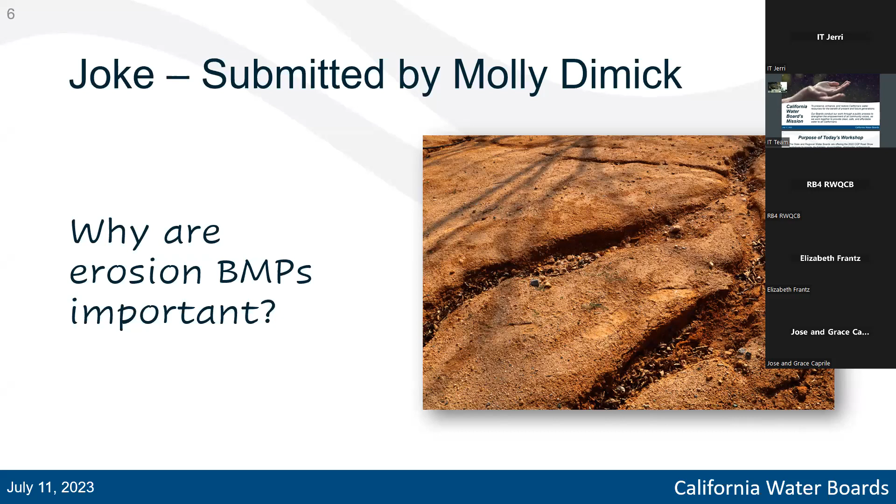And with that joke aside, let's move on to the requirement overview. So just to break down this presentation, I'm going to provide a little bit of background on the NPDES Construction Stormwater General Permit, and then move on into the requirements before getting into the question and answer session, but we'll have Matt's presentation in there as well.

So let's begin this presentation with some construction stormwater permitting context. The Federal Clean Water Act prohibits certain discharges of stormwater to waters of the United States, except those that comply with a National Pollutant Discharge Elimination System permit. The Construction Stormwater General Permit is a specific NPDES permit that regulates discharges of runoff generated by precipitation over construction sites and other areas of active land disturbance.

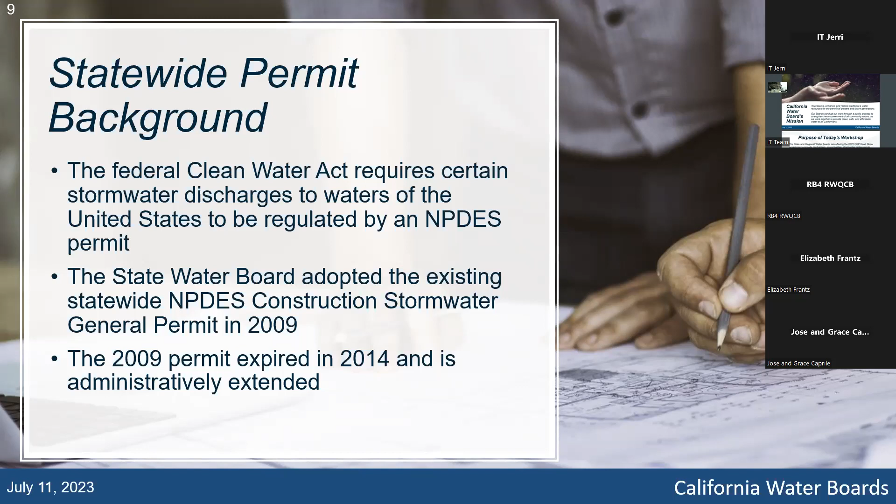The State Water Resources Control Board adopted the previous permit in 2009 to regulate stormwater discharges associated with construction activities disturbing one or more acres of land. The 2009 Construction Stormwater General Permit expired on September 2nd of 2014 and has since been administratively extended. The 2022 CGP serves to implement new regulatory requirements such as the federal effluent limitation guidelines, statewide policies, and total maximum daily loads that became effective since the adoption of the 2009 permit.

Yeah, go ahead and mute. Okay.

During the adoption meeting, the State Water Board determined that September 1st, 2023 was a reasonable date for the permit to become effective, allowing for State Water Board staff to develop guidance, host these workshops, and update SMARTS. September 1st, 2023 also initiates the 2-year regulatory transition period where dischargers with existing coverage under the 2009 permit can continue that coverage until August 31st, 2025.

On September 1st, 2025, all remaining projects will be administratively terminated and will need to reapply for permit coverage under the 2022 permit to continue their construction activities. Existing dischargers that wish to transfer coverage from their 2009 permit to the 2022 permit may do so by submitting a notice of termination after obtaining coverage under the 2022 permit.

So first, let's discuss which projects require permit coverage. Not much has changed here. Projects that disturb 1 or more acres of land, or are less than 1 acre but are part of a larger common plan of development, require permit coverage. Projects that were planned together but are separated by 1/4 of a mile are not considered part of a larger common plan of development. As with the 2009 permit, there are some differences between the traditional and linear construction projects in terms of the requirements that they comply with. So I just wanted to note that here.

And then the notice of intent will include permit registration documents such as site drawings and maps, the stormwater pollution prevention plan, applicable post-construction plans and calculations, and then the first annual fee based on disturbed acreage. So pretty similar to the 2009 permit.

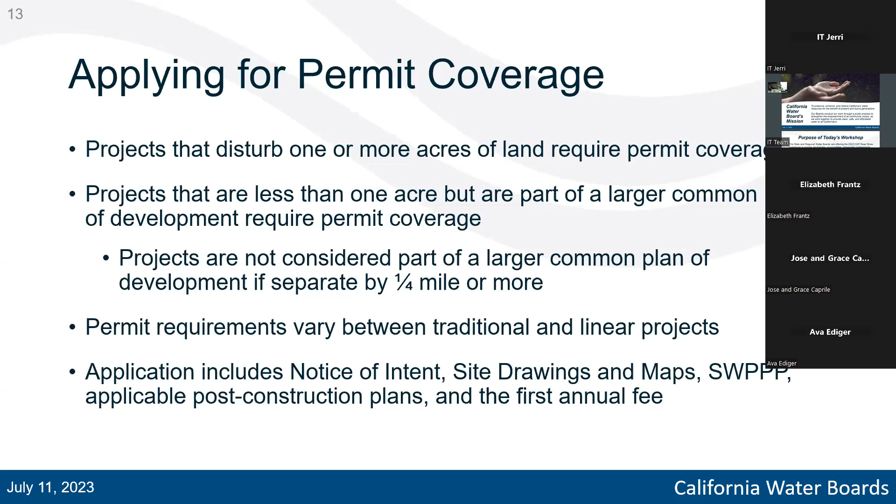For the post-construction plan submittals, there have been a few changes. Still, linear underground and overhead projects are not required to submit their post-construction plans. They're exempt from those requirements. Dischargers that are complying with a city or county post-construction requirement are required to submit with their permit application an attachment or web source containing the applicable requirements that you are complying with, and then the preliminary or approved post-construction plans and calculations. If the discharger submitted preliminary plans, they must submit the final plans within 14 days of receiving approval from the MS4, whether that be the city or the county.

Dischargers complying with the 2022 CGP's post-construction requirements are required to submit their post-construction plans and calculations with their permit application as well. And that's done through the calculator in SMARTS. And then the regional water board staff may review and request revisions if necessary for those complying with the 2022 permit.

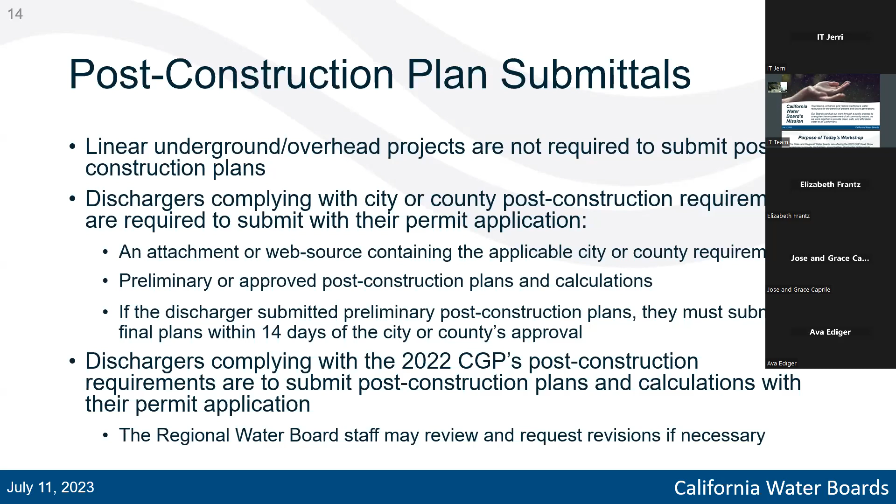The 2022 permit also provides region-wide programmatic permitting, so that dischargers can cover multiple non-contiguous linear projects under a single WDID within a given region. So in order to qualify for this, you have to be a linear project, for one, and then you have to be located within a single regional water board jurisdiction, be a group of projects with similar scopes and common construction activities, and have the same legally responsible person.

And so part of applying for programmatic permitting coverage is what's called a common stormwater pollution prevention plan. This details all of the best management practices and the monitoring schemes that would apply to all of the sites covered within this regional programmatic permitting. And then in order to add acreage under this, you would have to submit a linear construction activity notification to have your additional projects covered under the same WDID.

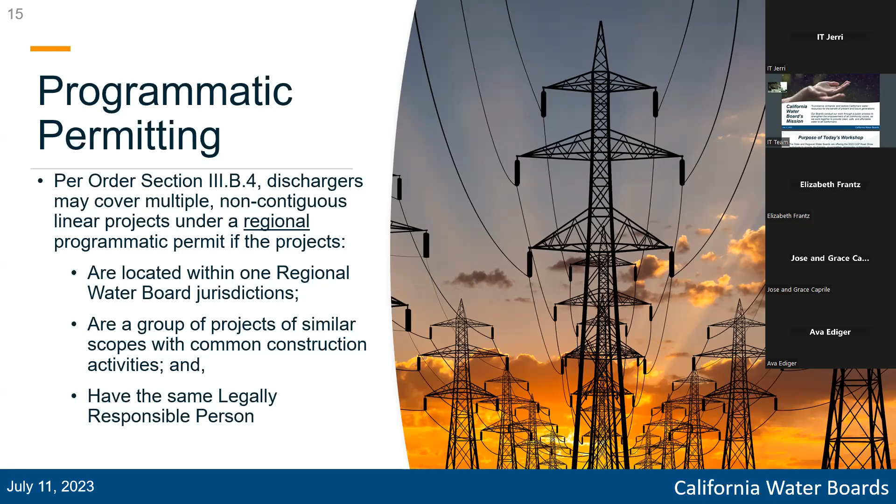All right. The 2022 CGP includes a provision for property owners to submit a notice of non-applicability, which essentially means that the project is located in a basin or watershed that is not hydrologically connected to waters of the United States, or in other words, does not have the potential to discharge to waters of the United States. An example that comes to mind for applicable watersheds would be the Lancaster-Palmdale region of California.

Oh, let me go back one step. Okay, sorry. This option is only available to dischargers when the site is not hydrologically connected to waters of the United States. So this means that relying on a constructed basin to capture stormwater is not a sufficient justification for applying for the notice of non-applicability, as basins can fail and result in discharge to waters of the United States.

In some limited instances, a project that is being built in a location that was previously altered to such a degree that stormwater runoff will never discharge to waters of the United States, the Regional Water Board may find that a notice of non-applicability is acceptable. I'm thinking of some rare cases here, but one project that came to mind was a construction project within an abandoned quarry. There was basically a giant pit in the ground and had no waters of the United States that ran through.

So if you have any questions regarding the notice of non-applicability, I recommend contacting the Regional Water Board staff to see if your site is eligible. If the project meets the criteria, a California licensed engineer or geologist with hydrological expertise must prepare a site-specific no discharge technical report as part of the NONA application. And once all of that is submitted, you'll be issued a notice of non-applicability ID, and the regional water boards can determine whether or not they agree with that at a later date.

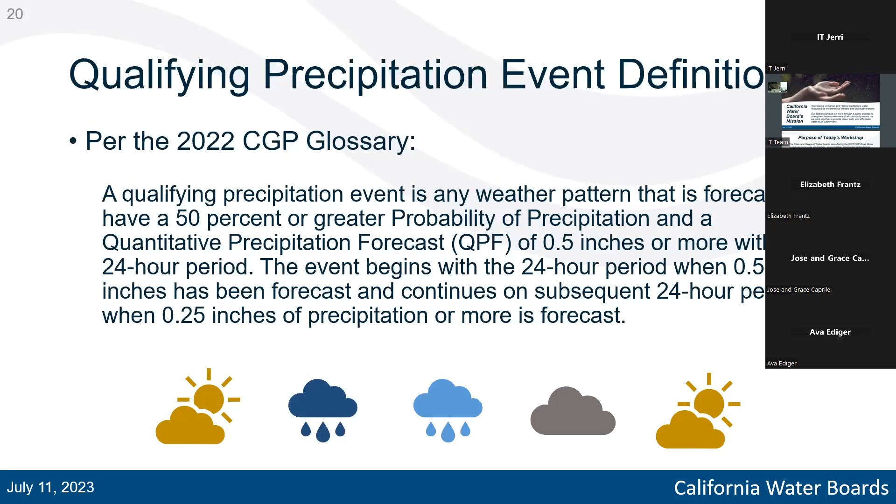All right, now the fun part. Let's talk about the qualifying precipitation event definition. So per the 2022 CGP glossary, a qualifying precipitation event is any weather pattern that is forecast to have a 50% or greater probability of precipitation and a quantitative precipitation forecast of 1/2 inch or more within a 24-hour period. The event begins with the 24-hour period where 1/2 inch has been forecast and will continue on subsequent 24-hour periods when 1/4 of an inch or more of precipitation is forecast.

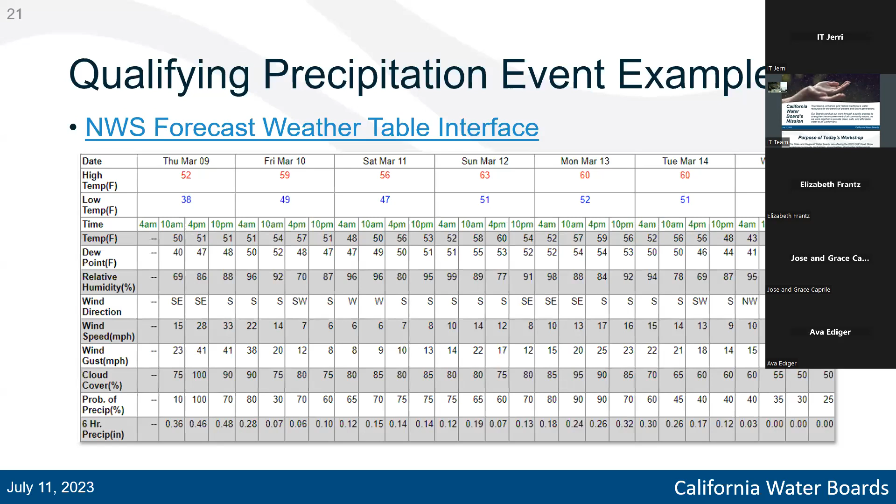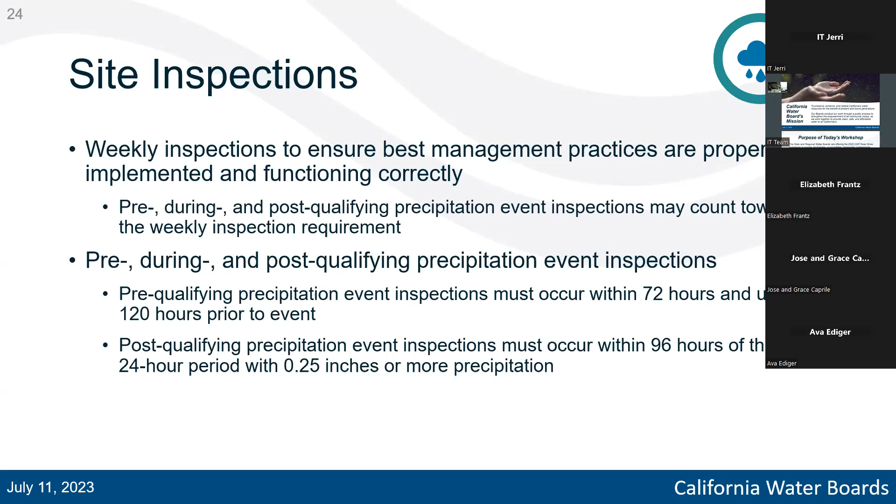Stormwater discharge monitoring. Risk level 1 dischargers are still not required to sample stormwater discharges for pH and turbidity like the risk level 2 and 3 dischargers do. Risk level 2 and 3 dischargers are required to obtain 1 sample from each of the actively discharging locations per 24-hour period of a qualifying precipitation event. Risk level 2 and 3 dischargers shall use their calibrated field meters to analyze the stormwater for pH and turbidity. And then since only 1 sample is required per 24-hour period per discharge location, there is no daily averaging per discharge location or site.

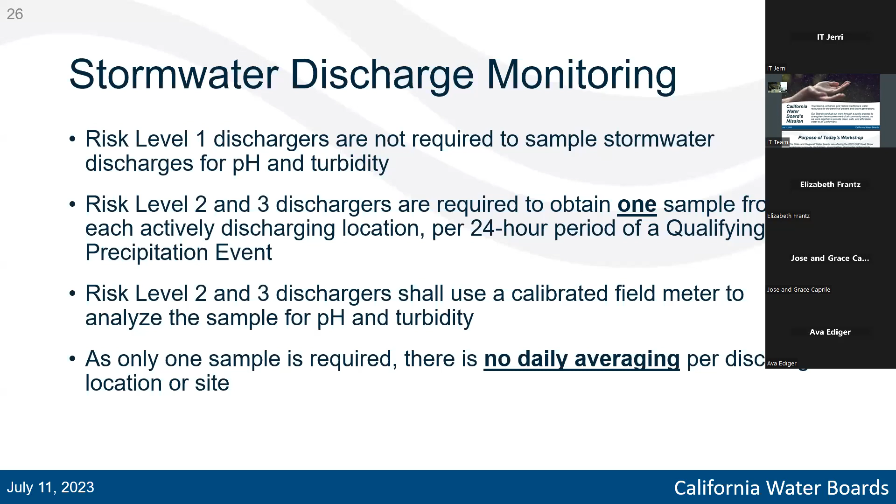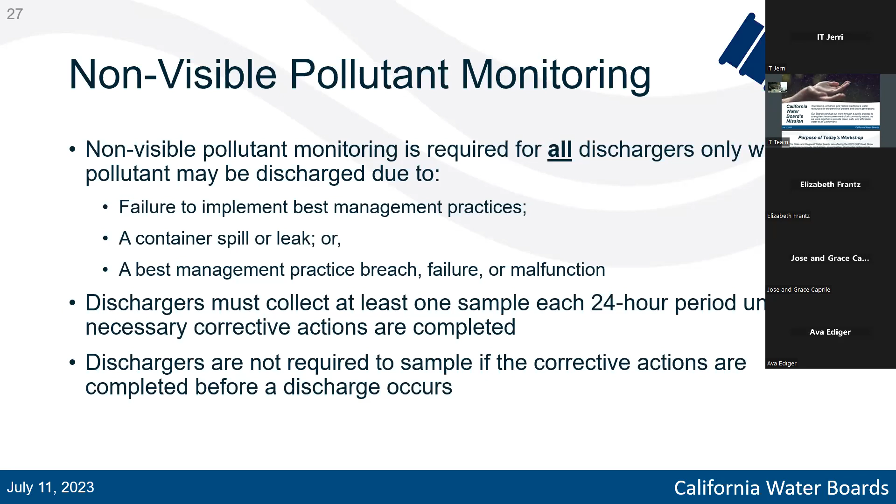This permit also emphasizes the non-visible pollutant monitoring requirements, which were also part of the 2009 permit. Non-visible pollutant monitoring is required for all dischargers, including risk level 1, only when there is a pollutant that may be discharged due to a failure to implement best management practices, a container spill or leak, or best management practice breach, failure, or malfunction. Dischargers must collect at least 1 sample each 24-hour period until necessary corrective actions are completed. Dischargers are not required to sample if the corrective actions are completed before a discharge occurs. That's an important note.

All right, next we'll move into attachments F through J, which present requirements for discharges with specific activities or within specific watersheds. I'm going to start a little bit out of order because this is probably the one that's on everyone's mind, starting with attachment H, which addresses total maximum daily load implementation requirements, since some of these requirements are related to the permit's monitoring requirements that we just discussed.

A total maximum daily load is an existing regulation that the Regional Water Board or US EPA adopts into the Regional Water Board's Water Quality Control Plan, otherwise known as a basin plan. Total maximum daily loads address pollutants that cause impairments to water bodies by establishing a sum of allowable pollutant loads into specific water bodies or watersheds from all identified sources of that specific pollutant. I guess I already talked about that. Let's see.

Total maximum daily loads address pollutants that cause impairments to water bodies by establishing a sum of allowable pollutant loading from their identified sources, but they are not self-implementing and are implemented through the requirements adopted in permit orders, such as an NPDES construction stormwater general permit. NPDES dischargers are considered point sources of pollutants and are occasionally assigned what's called a waste load allocation through a total maximum daily load to limit the discharge of that pollutant.

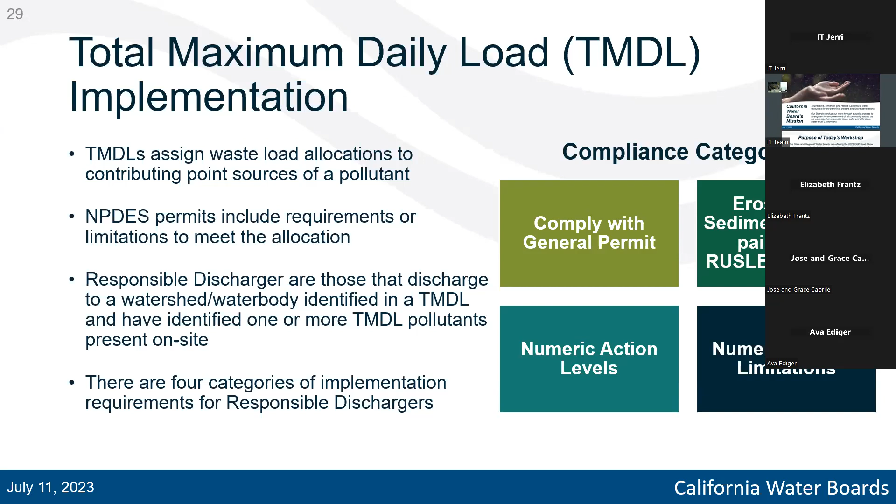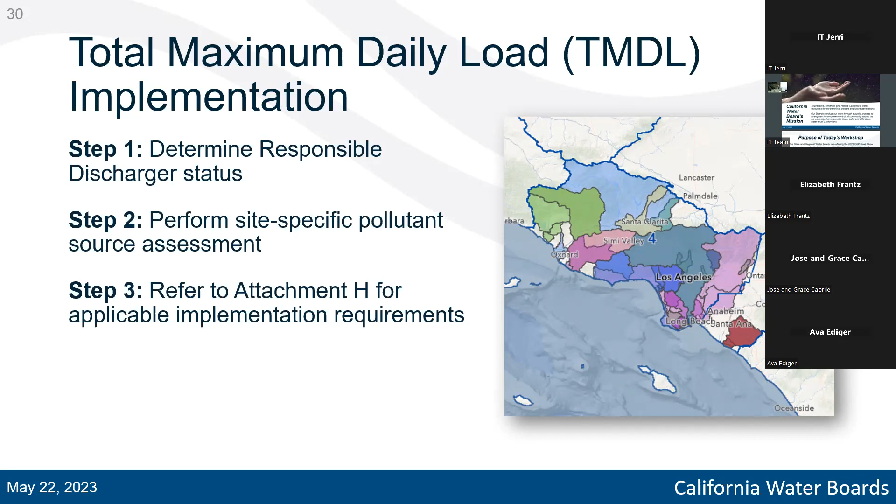So in the event that the discharger has to comply with a total maximum daily load related numeric action level or numeric effluent limitation, the discharger would assess their discharges through the non-visible pollutant monitoring. All three of the following conditions need to be met in order for the TMDL sampling to be triggered. If any condition is not met, then TMDL sampling is not required. So first, the construction project has to discharge to a TMDL listed watershed or water body.

Second, their pollutant source assessment has to identify that a TMDL specific pollutant with a waste load allocation that was translated into a numeric action level or numeric effluent limitation has the potential to be discharged from the site. And then third, the non-visible pollutant sampling must be triggered. Non-visible pollutant sampling is triggered when there is a failure to implement best management practices, a container that spilled or leaked, and then if there's been a best management practice breach or failure.

If the spill, leak, or breach is not fixed and cleaned, and the best management practices are not implemented prior to discharge, then non-visible sampling is required. However, like I said before, if you do your corrective actions to clean up the spill, leak, or breach, and the best management practices are in place prior to discharge, the non-visible pollutant sampling would not be required.

That said, a TMDL-related numeric action level and numeric effluent limitation cannot be exceeded with just a single sampling point. Steps 1 through 3 must occur again with multiple samples above the numeric action level or numeric effluent limitation, and they have to be from the same drainage area and during the same reporting year to be considered an exceedance. Exceedances of numeric action levels require that the discharger implement iterative corrective actions, while exceedances of numeric effluent limitations are violations of the permit and subject to mandatory minimum penalties.

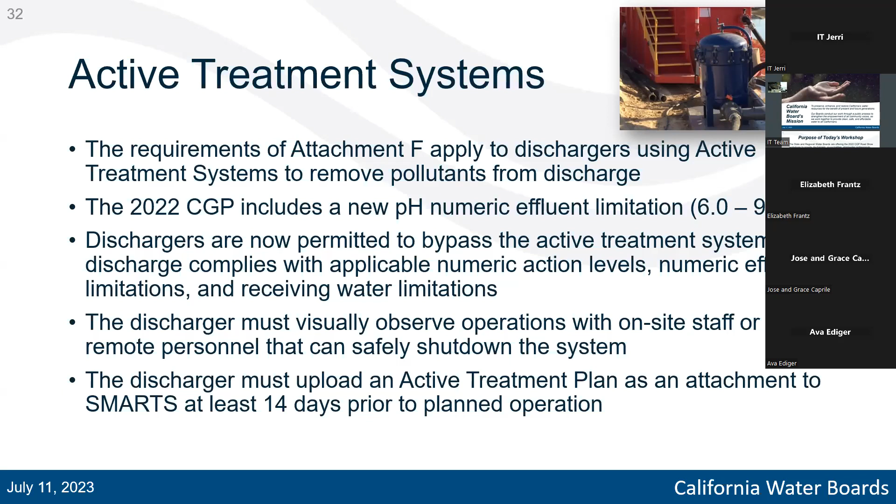Although active treatment was included in the 2009 permit, it lacked any requirements for the use of passive treatment chemicals or products, which are found in attachment G of the 2022 permit. First and foremost, applying the passive treatment products directly to receiving waters is strictly prohibited. Dischargers should be designing a treatment area within their site when using passive treatment. Furthermore, attachment G provides criteria for acceptable passive treatment chemicals, such as being non-cationic, being food grade, and also providing a range of charge densities and molecular weights that are acceptable.

It's also important to note that passive treatment is not to be used as a standalone best management practice. It needs to be used in conjunction with erosion and sediment controls to capture any of those solids that are settling out of the stream. And as with the active treatment plan, the discharger must submit a QSD prepared passive treatment plan through SMARTS at least 14 days prior to applying these products.

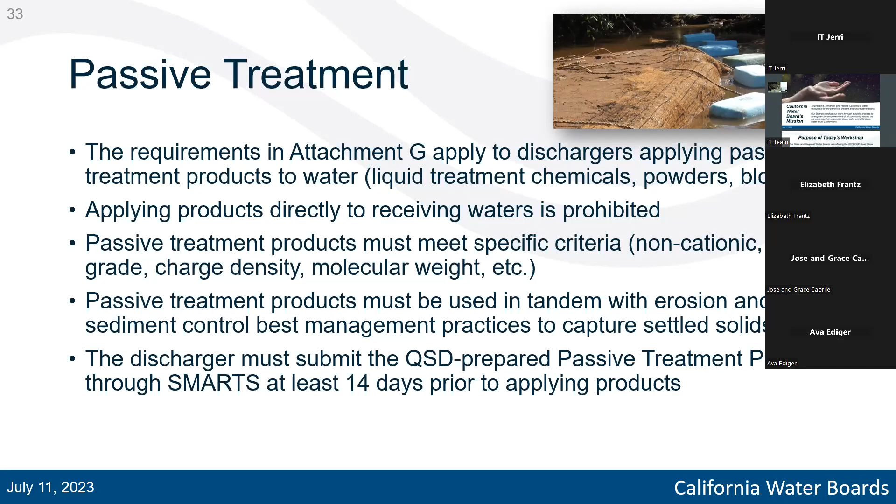All right. The requirements in attachment J apply to dischargers that are not subject to a separate NPDES permit for their dewatering activities. Dewatering is defined as mechanical pumping or siphoning of non-potable water from excavations, foundations, vaults, impoundments, and groundwater removal specifically related to construction activities. Dewatering discharges must comply with the pH and turbidity numeric action levels, which for pH is a range between 6.5 to 8.5, and for turbidity is 250 NTUs.

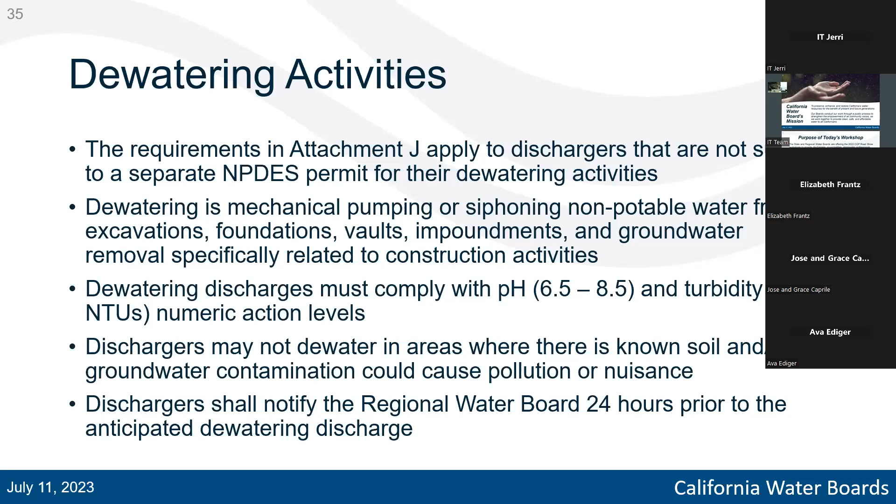Dischargers may not dewater in areas where there is known soil or groundwater contamination that can cause pollution or nuisance. And dischargers shall notify the regional water board 24 hours prior to an anticipated dewatering discharge. That can just be done by shooting an email to the applicable regional water board's stormwater email.

Okay, so this is kind of a random slide, I guess you could say. While surface water buffer requirements are not in their own attachment, I did want to touch upon them because they are a new minimum best management practice, or a requirement promulgated by the U.S. EPA's Construction and Development Effluent Limitation Guidelines. Essentially, the dischargers are required to provide and maintain natural buffers and/or equivalent erosion and sediment controls when a water of the United States is located within 50 feet of the site's earth disturbances, unless that is infeasible.

The surface water buffer requirements apply to work above the top of bank or high water level of waters of the United States. Work within channels, stream beds, or Clean Water Act 404 projects and 401 certified projects are actually exempt from these requirements, as well as projects where there are no natural surface buffers, thinking like an LA River channelized type situation. The discharger may use RUSLE2 or another regional water board approved method to demonstrate that the erosion and sediment controls are equivalent to the natural 50-foot buffer, if that is the option they are going with.

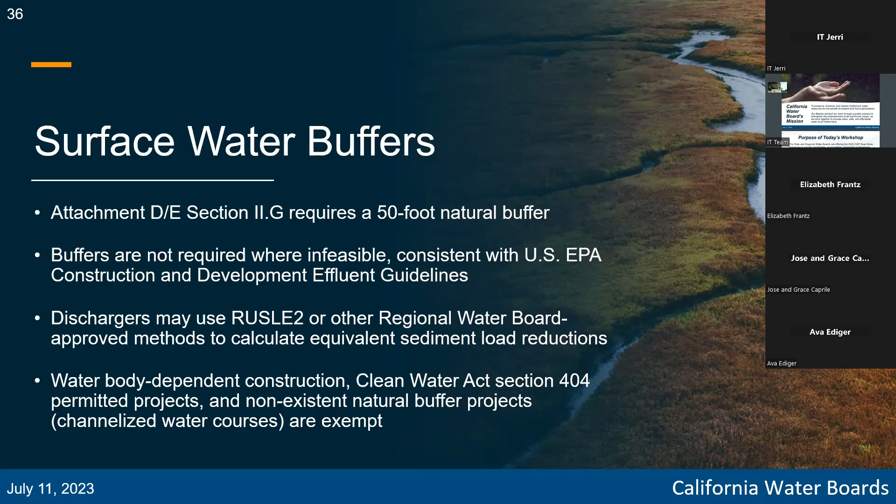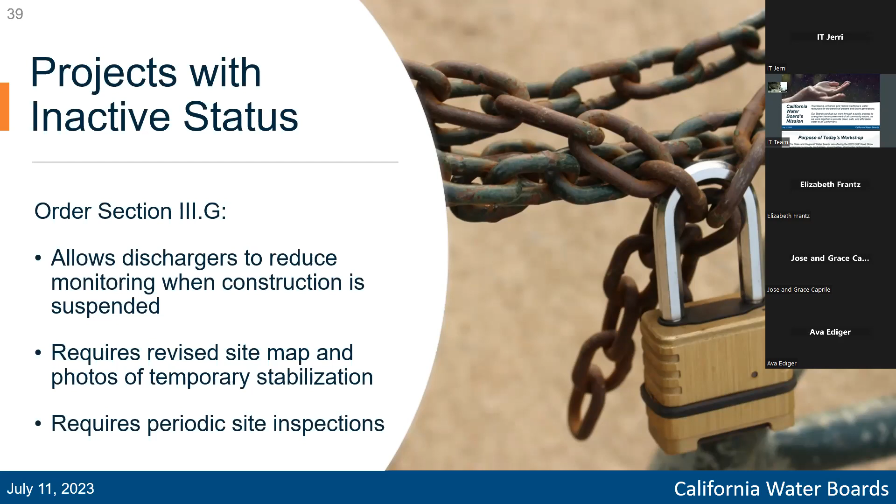The permit also incorporates a provision for dischargers, primarily large housing developers, to terminate residential lots that have unfinished yard and landscaping areas. In order to reduce acreage, the dischargers must meet the following criteria. The residential lot has been sold to an individual homeowner for residential use, and a certificate of occupancy or equivalent document is maintained at the home or on site. The lot has to be less than 1 acre of disturbance.

All construction activity conducted on the lot by the discharger has to be completed, and the discharger has to have installed temporary best management practices to stabilize the unfinished yard and landscaping areas. And then the discharger has to upload as an attachment to SMARTS documentation of a contract, such as covenants, conditions, and restrictions, or CC&Rs, requiring the individual owner to stabilize their yard and landscaping areas within 1 year of moving in and to maintain temporary best management practices until stabilization is met.

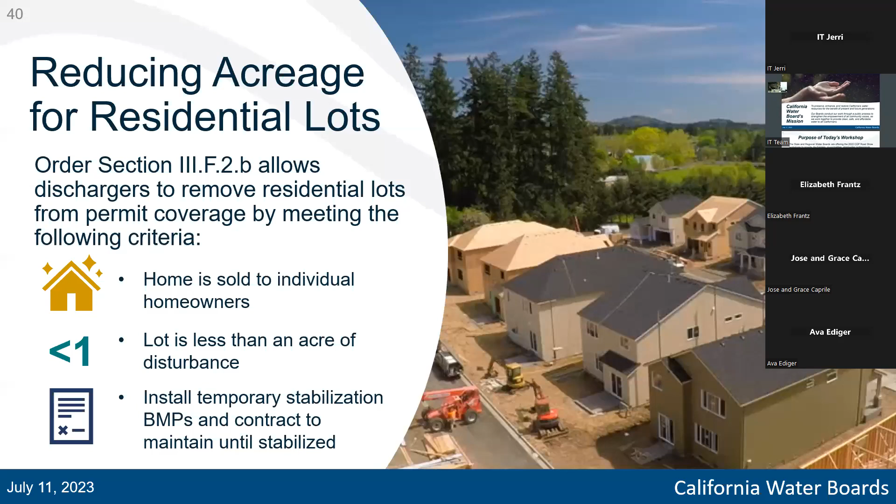All right, and then lastly, we'll do the notice of termination. So the notice of termination process requires that a qualified stormwater pollution prevention plan practitioner conduct a notice of termination final inspection. The discharger has to submit photos demonstrating the final stabilization, as well as photos of the post-construction best management practices that are in place. The discharger has to submit a final site map that details those completed construction features and the permanent erosion and sediment control best management practices.

And then the photos would be oriented on that map to allow the regional water board staff reviewing that notice of termination to understand what they're looking at from their desk. The discharger also has to include a long-term maintenance plan for the post-construction best management practices. And this is as simple as just saying, here are the post-construction controls that are in place. The tenant is taking over control of maintaining those, and this is how frequently they are going to maintain them. So nothing too crazy there. And that's actually an existing requirement that has long gone kind of ignored.

So a new provision is that the notice of termination will be approved if the regional water board does not deny, return, or accept that notice of termination for review within 30 days. So depending on the amount of notices of termination, there might be a prioritization of which ones they do accept for review and which ones they'll let lapse with the 30 days.

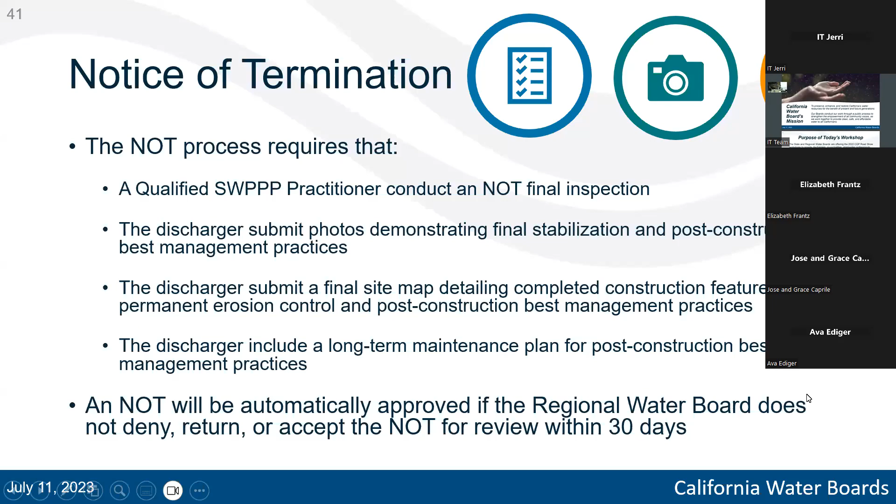So hello, everyone. My name is Matthew Shimizu. I'm an environmental scientist in the Industrial and Construction Stormwater Unit. I am the current Industrial and Construction SMARTS lead, and I recently took over for Patrick Osuji in that capacity. And today I'm going to be giving you a presentation on some of the new SMARTS enhancements that we are looking to include specifically for the construction notice of intent.

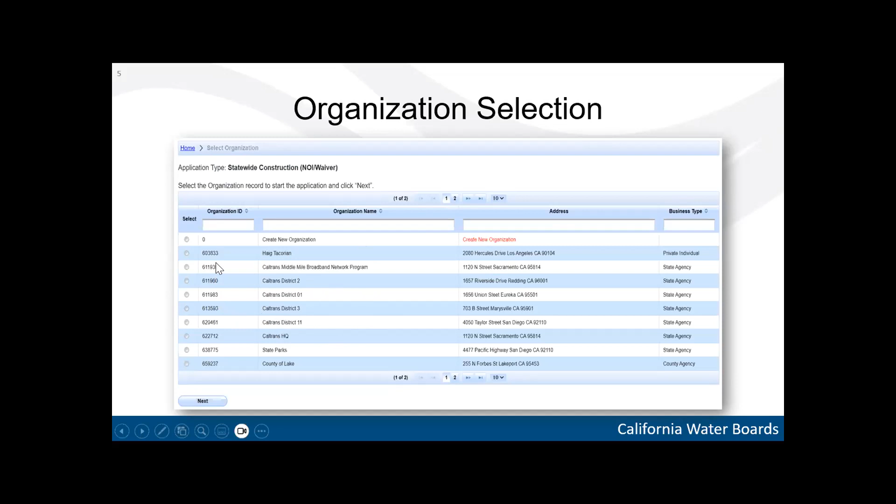From there, the user can then either add or delink other users to the application, and then that will confirm. So as you can see here, myself and Alex are the only individuals currently linked to the organization that I selected right here. And I can add an additional LRP, other duly authorized representatives, or data entry persons. And then once this all looks correct, I would hit the confirm and create application button and then be placed in the pre-application screen.

And so basically, once these steps have been completed, the user will be placed into the pre-application question section. Users will then move through all the tabs and complete the application. And then finally, either the LRP, the legally responsible person, or the duly authorized representative will certify and submit that application in for State Board's review.

Okay, and then as discussed, this is the pre-application question screen right here. This is a new functionality that we recently added, and its purpose was to help dischargers select the correct application type that they're applying for. So as you can see, when hovering over the three available application types, the notice of intent, erosivity waiver, and notice of non-applicability, it will provide the user with a general description of the application type and some general requirements as well, just to help you determine what application is best applicable for your site.

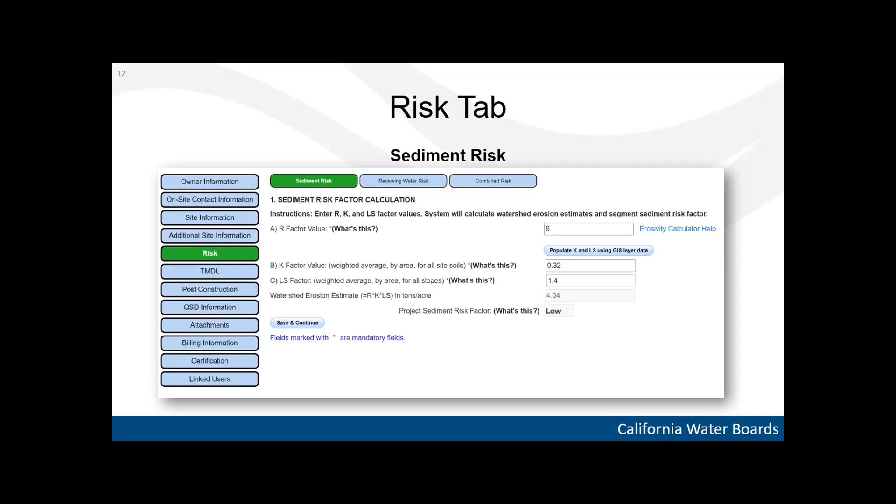Okay, so with the risk, I have it kind of split up into 3 different tabs, but there have actually been no changes made between the 2009 CGP and the 2022 CGP for this risk tab. So everything remains the same, but I'll just give you a quick overlook of what the new screens look like, but everything works as it does currently.

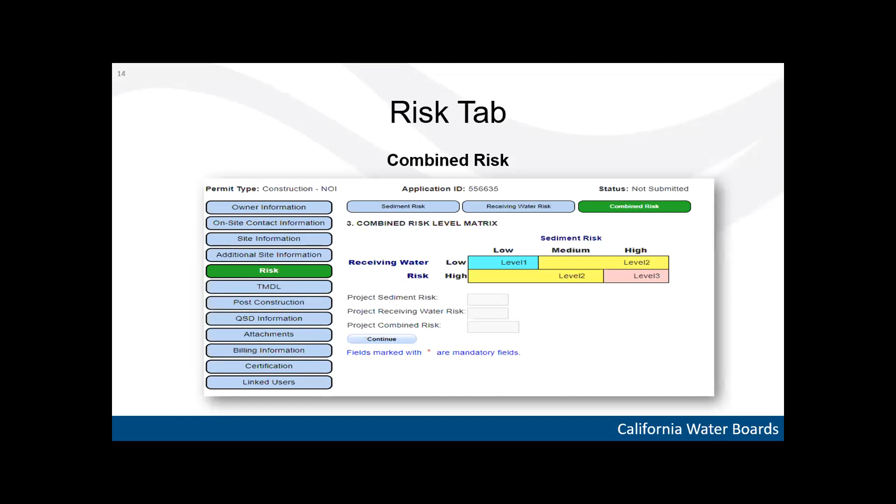Okay, so now let's discuss the total maximum daily load, or TMDL tab. The total maximum daily loads are a new provision incorporated during the 2022 CGP reissuance, and is now a new tab in SMARTS for construction. Similar to the industrial general permit, one of my colleagues on staff, Reed Hoshovsky, actually created an impaired water body watershed mapping tool specifically for construction TMDLs. And so I'm going to give you a quick breakdown of the TMDL process.

So the first step is to use the external TMDL mapping tool. At the very top of the screen, you can see there's that little hyperlink, TMDL map tool. You'll want to click on that, enter in the project's coordinates, and then see if the mapping tool spits out any impaired water bodies or watersheds. If the mapping tool does list some impaired water bodies or watersheds, you'll want to mark yes for that first question at the top. But if the tool does not list any, you would want to mark no for that first question at the top.

And if you do select no for the first question at the top, you're done, and you can continue to the next tab or to the post-construction tab. But if you do select yes, then it is up to the discharger to select all of the impaired water bodies or watersheds that apply to that project. So for example, let's say the mapping tool provides you with 3 impaired water bodies or watersheds. The discharger doesn't necessarily need to select all 3.

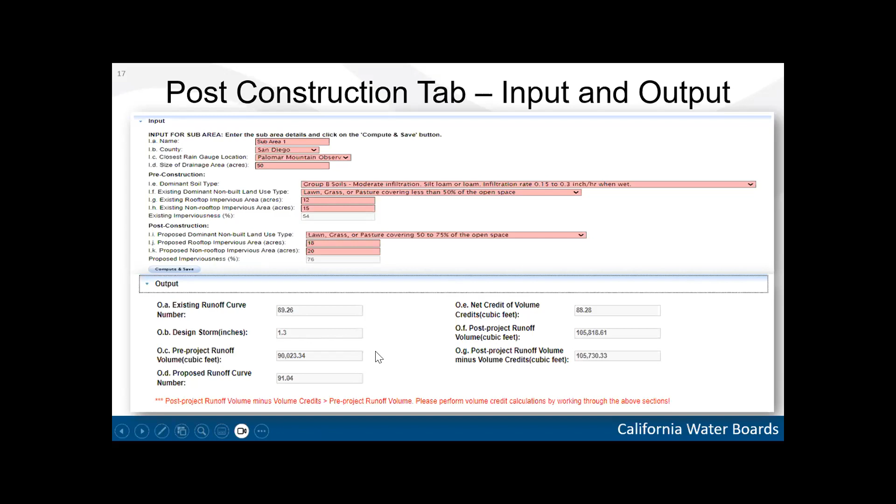And we did this because we thought that it would be better suited in the post-construction rather than the site info tab. And these fields are also now being automatically generated based on the inputs for the pre-construction and post-construction values, rather than being a manually entered value as it previously was on the site info tab. And as for the output section, all fields and functionality remain the same. This is just an auto-generated field based on the inputs and/or the credits used.

And finally, we have the credits portion of the post-construction tab. So we added one new credit, which was the basins credit, as you can see right here. And we only really asked two questions. So we ask if the minimum drawdown times are included in the basin's design and what the basin's total capacity is. And then, just FYI, the first question must be a yes in order to receive any credit for the basins credit.

Okay, moving forward, as I mentioned from the additional site info tab, we created a QSD information tab on its own. And so as you can see right here, previously, dischargers would add a single QSD by going to the additional site info tab and then adding just one. However, we have since made it so the tab allows for multiple QSDs to be added to a single project, and that we can select a primary QSD as well.

And so what you're seeing right here is kind of the search screen. You can search by their last name, first name, or their email address, and then you can link a specific QSD to your project. And then this is the table right here, as I mentioned.